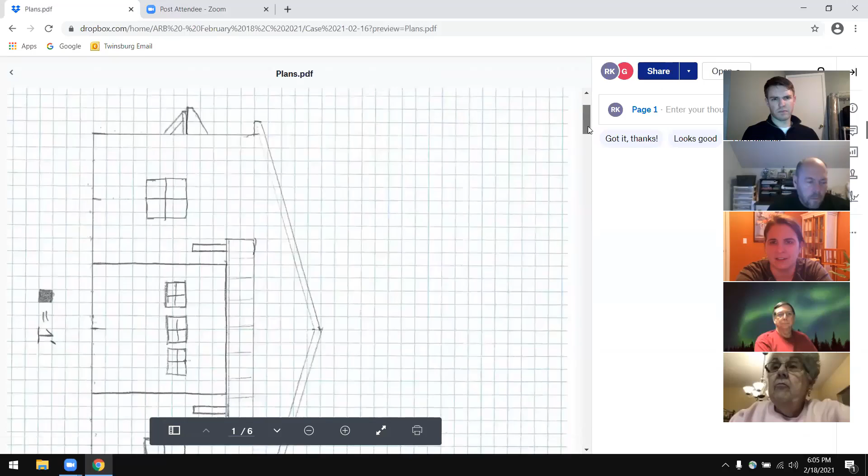Can you hear me? Yes. Excellent, can you see me? Not yet. Yeah, I see that. It's not giving me the option for my camera to make it a part. Oh, here we go. I'm in. Yes, you are. There we go. Hello. Hey guys, how are you? Good.

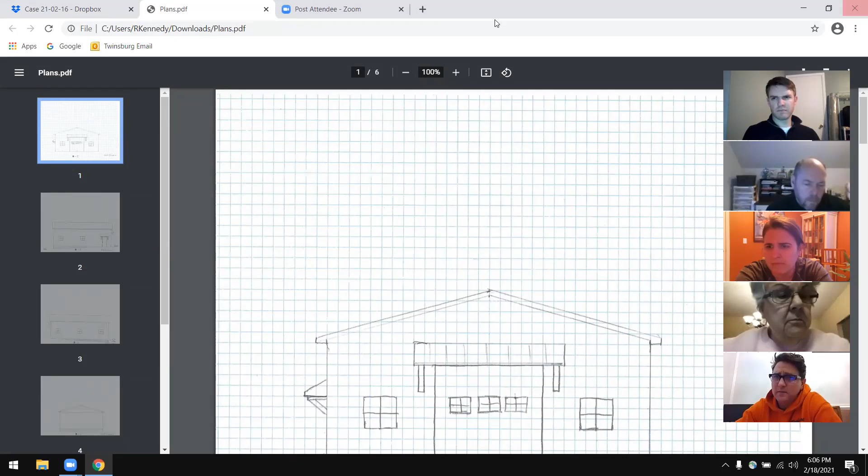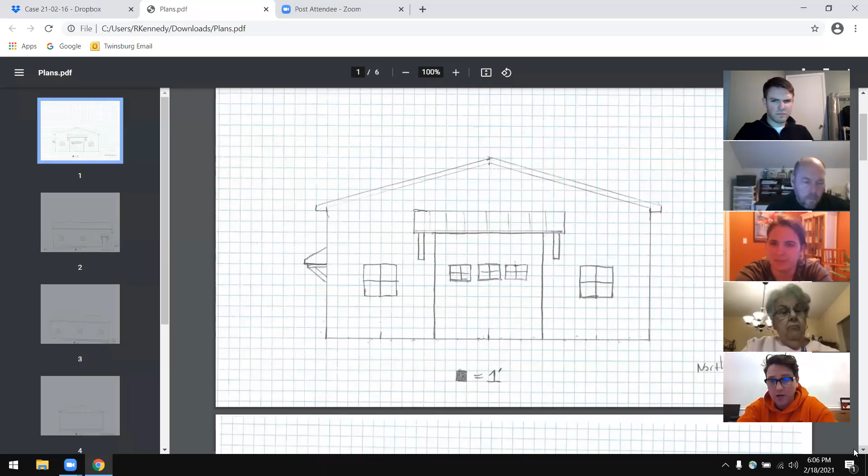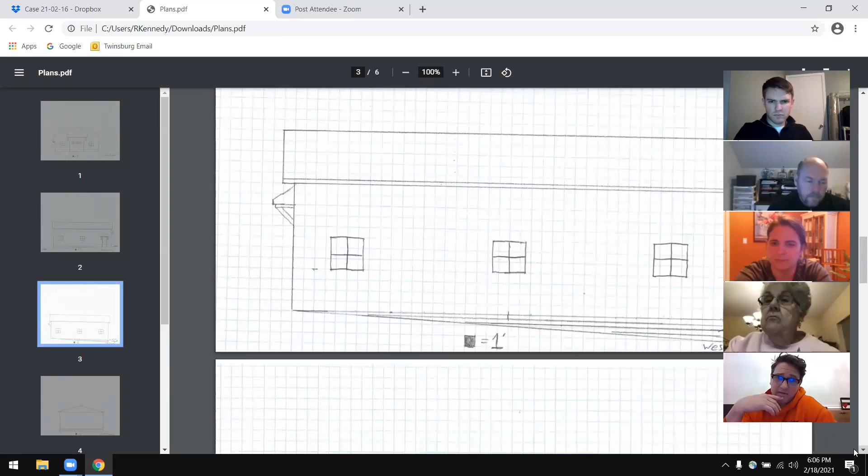This is a detached garage, I take it? Yeah, so very simple, very straightforward, very elementary drawing. But to scale, right? Yeah, savings, right? So this will be in the front yard of the current home, the front side yard I should say, within just touching the setback of the front yard. So essentially it's going to be a glorified pole barn with a little bit of detail to match the home, with some standing seam accents, the eyebrow over the garage door and the overhang over the man door on the side.

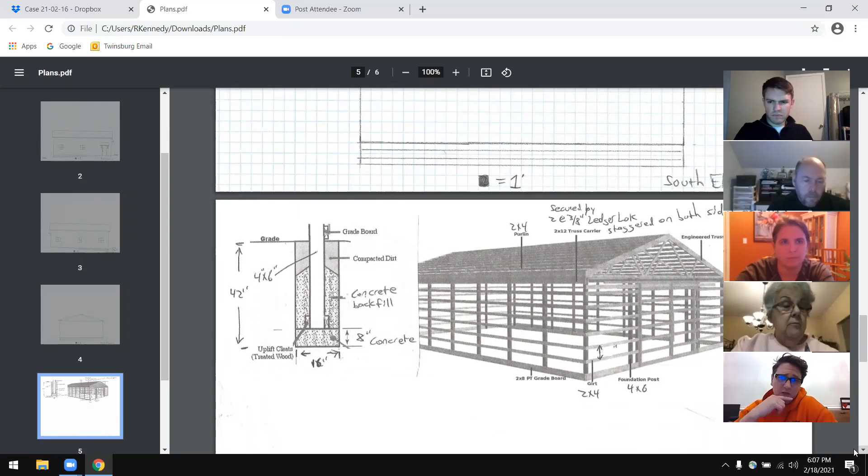I suggested, due to - their color scheme is going to be the typical kind of, as we've seen, just overdone these days, but the white and black. It's going to be black roof with black metal accents, white steel paneled walls. The main roof of the building, though, I am a little concerned because of cost reasons for the client.

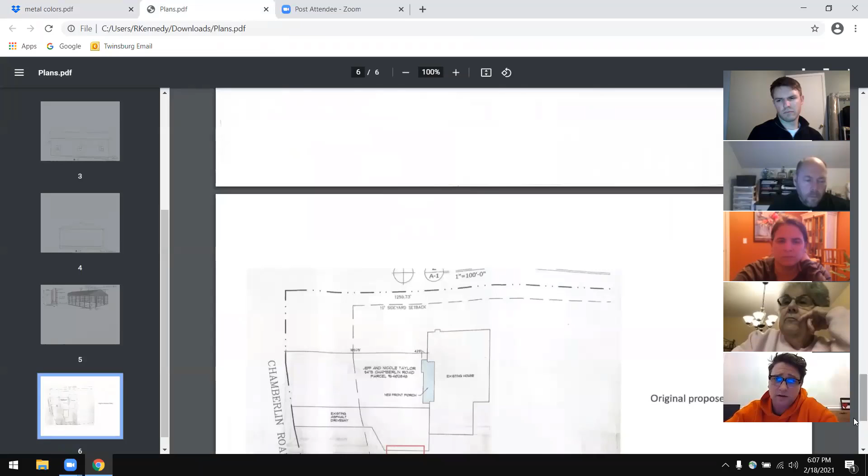There's currently standing seam on the house. We actually were the renovators of this house a few years ago, so at that time I did standing seam metal as an accent on the main house. So I'm curious to your thoughts on corrugated metal on something this large in the front yard, as far as the roof material, mixing with the standing seam metal roof.

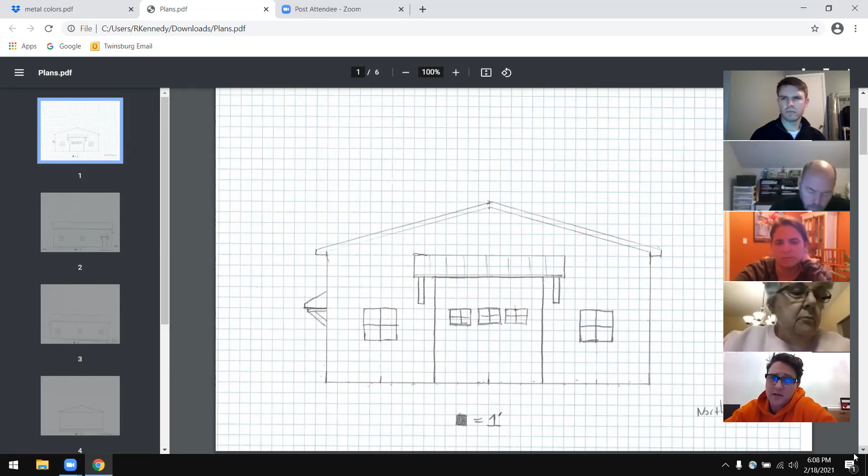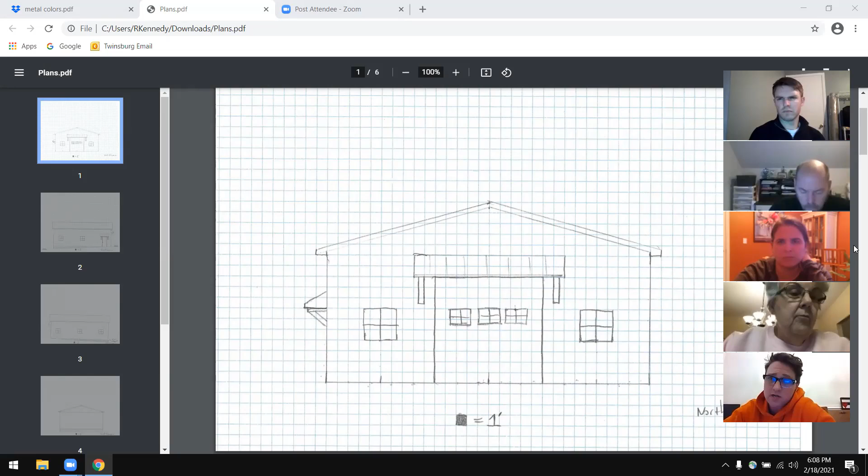I personally don't think it would be a good look, however there's a huge cost difference. The corrugated metal look is a lot less expensive than the standing seam metal. Or if the metal roof is not to be accepted as a corrugated metal roof on this building, then maybe we just stick to asphalt shingles on the building and do standing seam on the accent pieces over the garage door and the man door to tie into the existing house.

Yes, that I would agree. Hold on, it's Don Spice, one of our board members. Hi Don, are you able to call into the meeting?

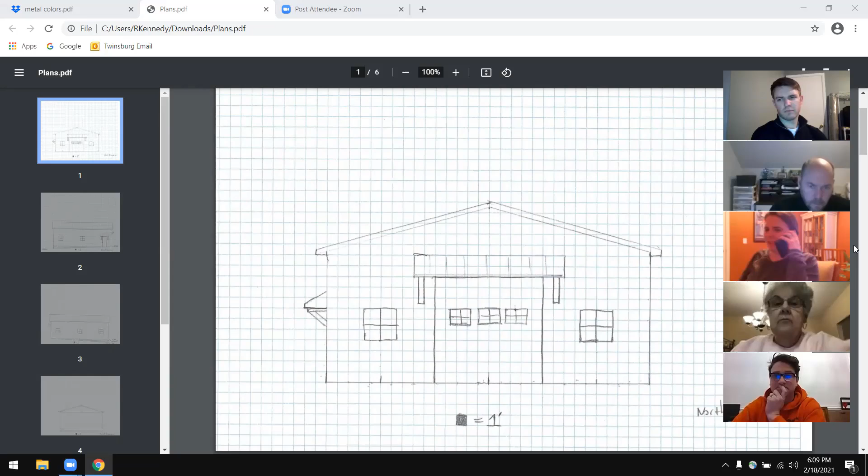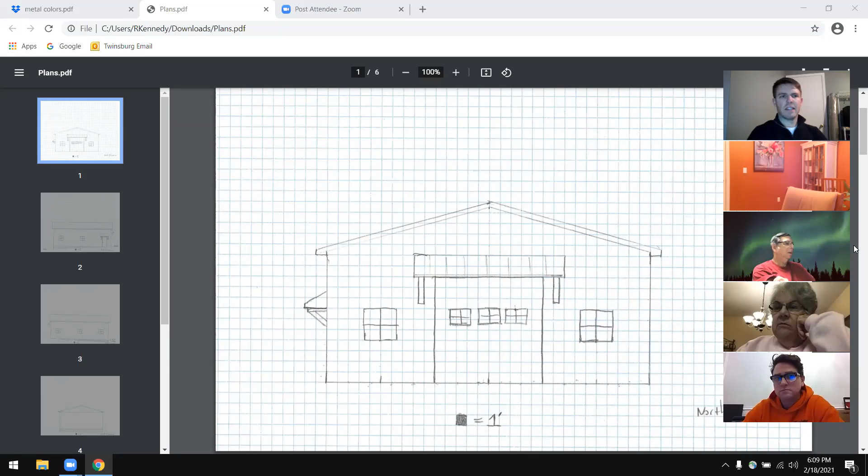Do you have any pictures of the existing home? Is there any on your pages here? I believe I submitted some. Well, I didn't see any on my PDF file, that's why I was concerned. Oh, it's a Zoom meeting. Yeah, there's not any - nothing that we got. I didn't submit anything for the existing home. Unless Ryan has some there. I thought I uploaded everything we have.

But is the footprint of this garage 20 by 40? That's kind of what I'm guessing. Well, this is a 30 by 40. 30 by 40? Okay, that's what's on the site plan, that's what that original proposed is, okay.

What color is the existing home as far as siding? The vinyl siding on the north, south, and east side has a couple of accents. The front facade of the home is brick painted. I painted it white originally, but they painted it a grayish tone. However, there is a gable face over the master bedroom on the front of the home that is also white vinyl siding. But the rest of the home is white siding, white 4-inch lap siding.

And can you still get the asphalt shingles to match the existing home? Yeah, it's pretty standard, charcoal gonna black.

Put you on speaker until we finish this case. Don, is that okay? Okay.

I would rather see them put asphalt shingles than a corrugated roof. Yeah, I agree. So would I. I think the metal roof is the look they want to go for, but unfortunately, the price point for standing seam on that big of a building is quite the sticker shock. Right, I'm the same, I agree. I would do asphalt shingles to match the house and standing seam for accents, or standing seam for the entire thing. Okay.

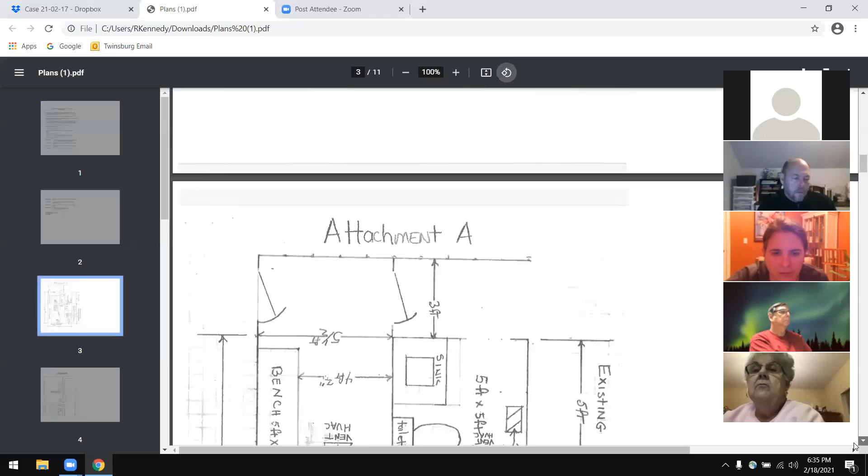I've got it. Vince is in the meeting. He's ready. I'm just in trouble with the Zoom. Okay. And I'm gonna drive my wife crazy, she's trying to help me.

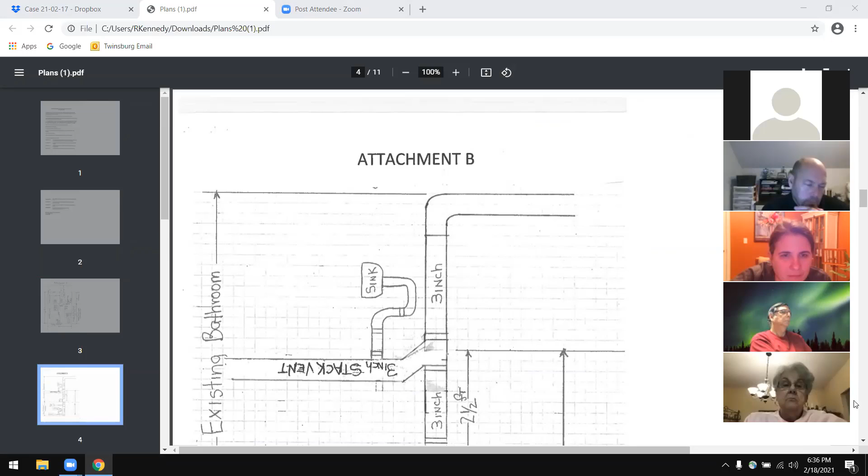So Vince, do you want to start presenting your addition? Vince, we can't hear you. Vince is unmuted, but I don't know, we're not getting anything from him.

Do you guys want to review it, or do you want to move on? Is he there? He's on the line. Yeah, I can see his video. Vincent, can you give us a wave if you can hear us? Is there a chance that he doesn't even hear us right now? I can see our applicant present, but not participating at the moment.

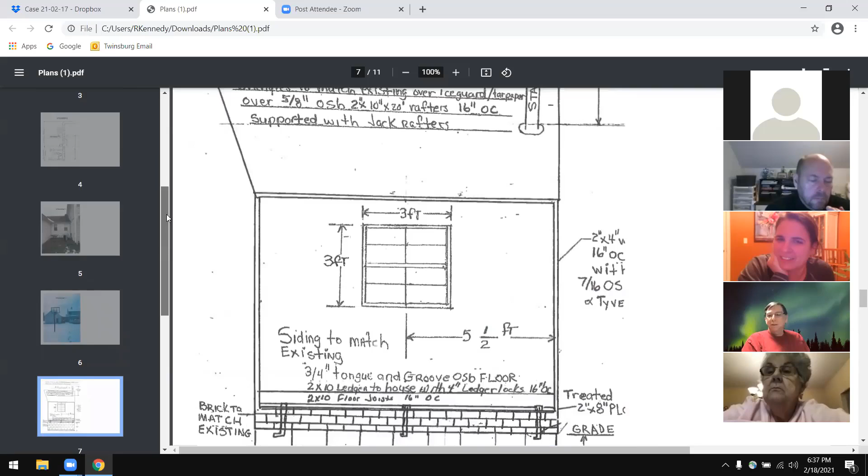So I'm hearing you on the phone. Right. Do you have a phone number for him? You can call him real quick and see if he's got his audio on. He may not have video or audio either way. Because he doesn't look like he's responding to anything we're saying, he's just kind of staring at the screen, I think. Right, I think he's looking at something else. He probably minimized this and he's going to check back, and he doesn't realize his case is up. Oh, he sees it.

He says he can see the board, but I can't. All right, oh, we hear there you now, there you go. Vince, I believe we can hear you now. Yes. Okay.

Okay, so is this an addition to your home? I don't think he hears you. He said I have no sound. I would put this on hold and go on to the next case. Yeah, I hit the unmute button. If he can't hear us though, maybe I'm not supposed to be typing. They might be talking about it, then they're gonna come back and ask me questions. Well, you know, Vincent, they can hear you. Are you there? Okay, are we able to type to him to let him know that we can hear him?

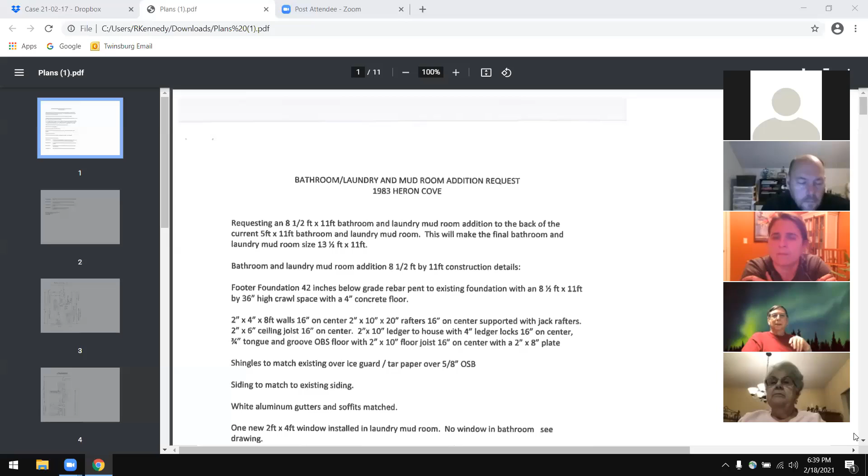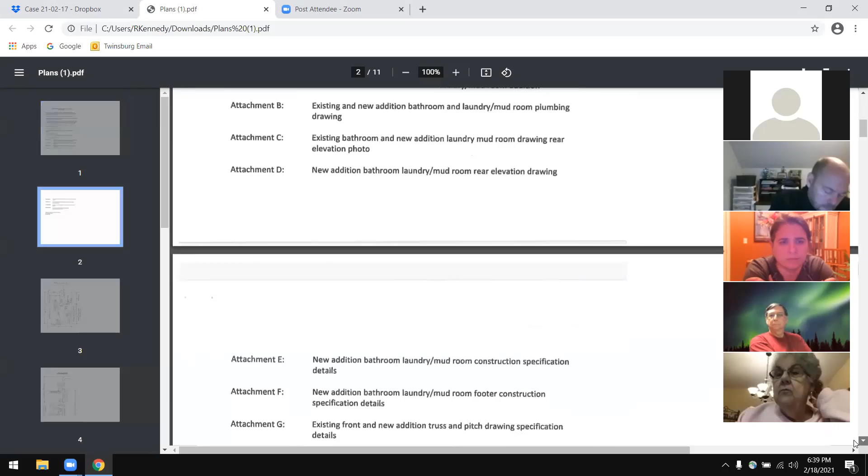My request is to add a 93.5 square foot addition onto my existing laundry room and bathroom on the first floor. As you can see from the footer foundation drawing, the footer foundation is going to be 42 inches below grade with rebar bent to the existing foundation.

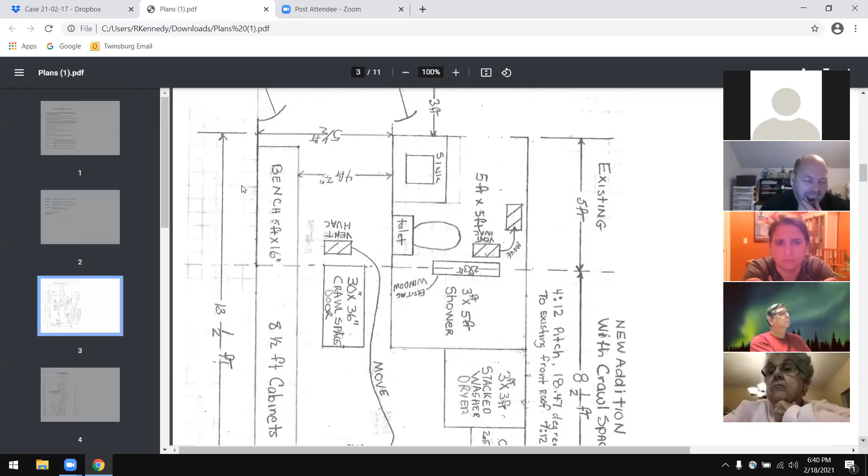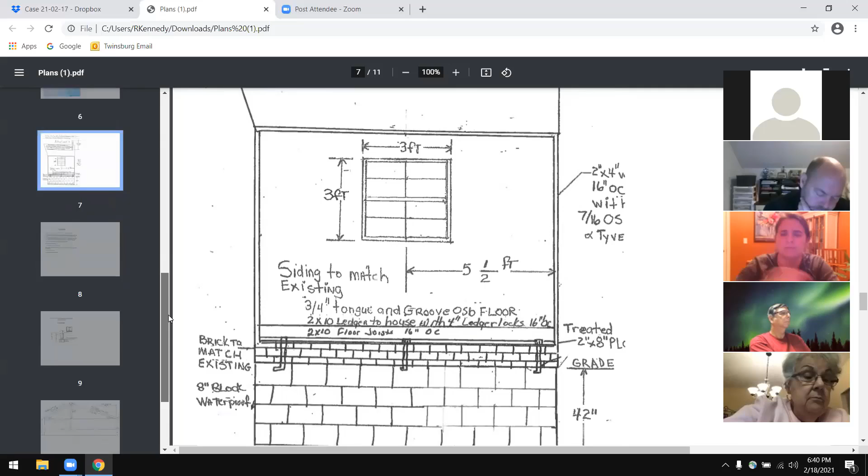It's going to be an 8.5 foot by 36 crawl space with 4 inches of concrete. We're going to use 2x4 by 8 foot walls, 16 inches on center. The roof rafters will be 2x10s by 20s, 16 inches on center, with jack rafters. The ceiling joists will be 2x6s, with 2x10 ledgers to the house using 4-inch lags, 16 inches on center, and 3/4 tongue and groove for the OSB floor, with 2x10 floor joists, 16 inches on center.

There will be a 2x8 treated plate. The shingles will match the existing shingles, with ice guard and tar paper over 5/8 inch OSB roof. The siding will match the existing. The white aluminum gutters and soffits will be matched - as a matter of fact, we're going to use the existing.

One new window - actually that window is not going to be 2x4. That window is going to be a 3x3. I don't know, that was a typo. On the print, I have a 3x3 window.

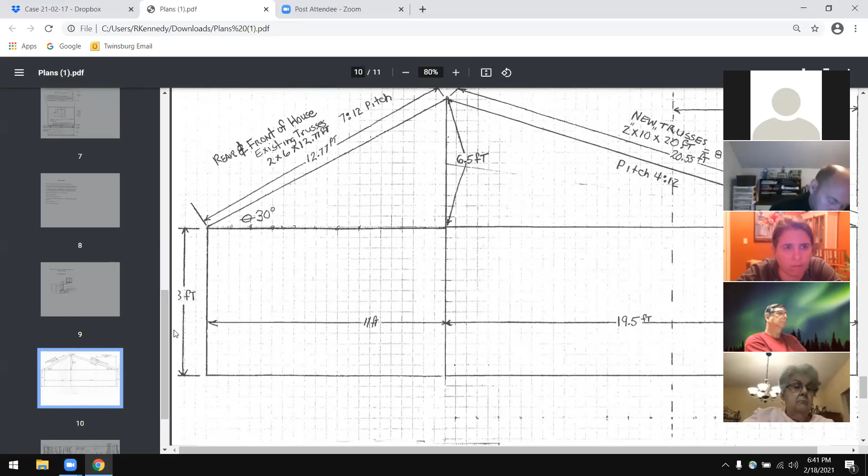The brick is going to match the existing brick. The new roof pitch will be a 4:12, which is roughly 18.47 degrees.

I provided you the following floor plans, which I see you have already gone through. The floor plans and the following attachments will be A, B, C, D, E, F, G, H, and what they're titled is right next to them.

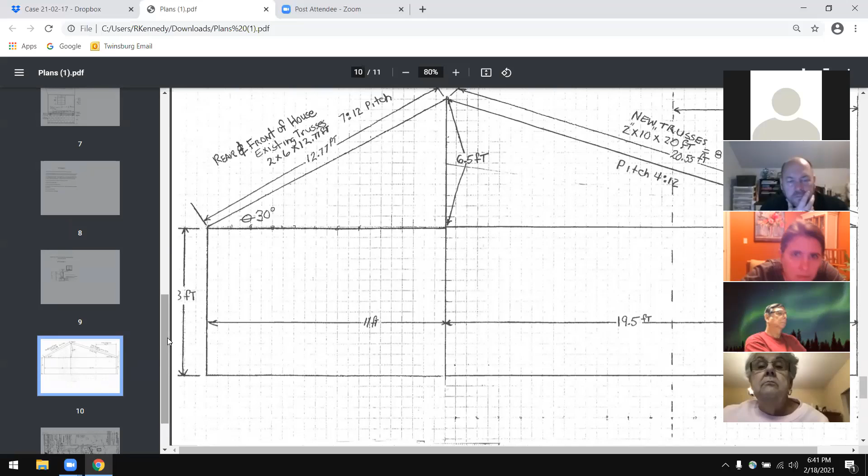Beginning with attachment A, I've shown you the existing restroom and laundry room, and the dotted line that cuts through shows the existing structure. The only thing not shown in that drawing is where the crawl space is in the new mud room and laundry area. I didn't put the existing window because I thought it would be confusing alongside the new crawl space hatch.

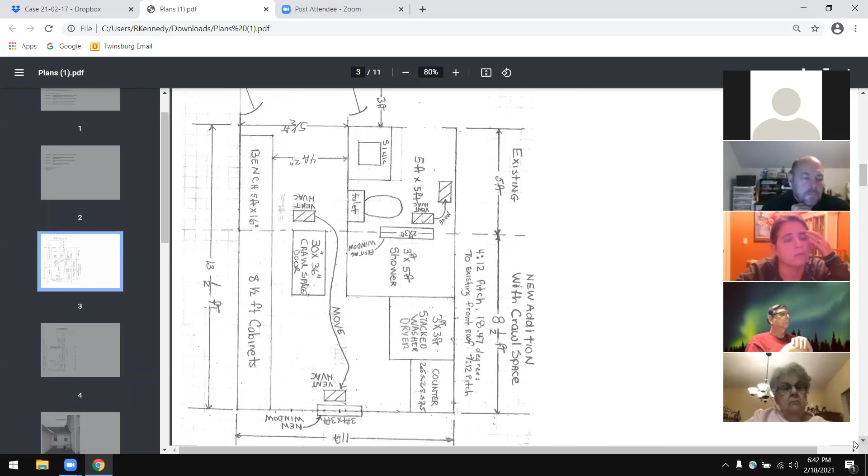As you can see, I'm going to have benches and cabinets running along one wall, and then I'm going to move the HVAC heating duct from its current location all the way to the back wall under the new 3x3 foot window.

In the restroom, the vent is going to be moved from its existing location over one joist or floor rafter, to prevent anyone from having to step on it to get into the shower. The 3x3 window is going in, and we're going to have a shower roughly 5 foot by 3 foot.

On the back side of the shower, I'm going to have either the washers stacked or side by side - right now the plan is to stack them, and if I do, I'll have a counter there. The 3x3 window will be in the back, matched to the same sashes and type of windows I currently have on the house.

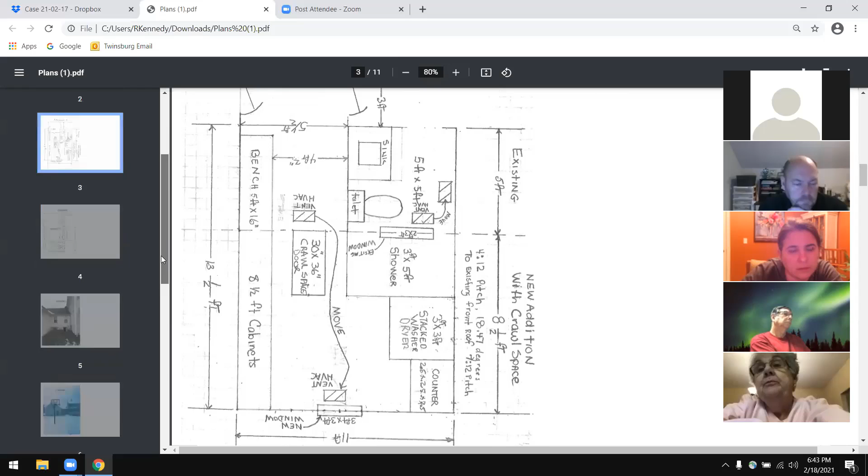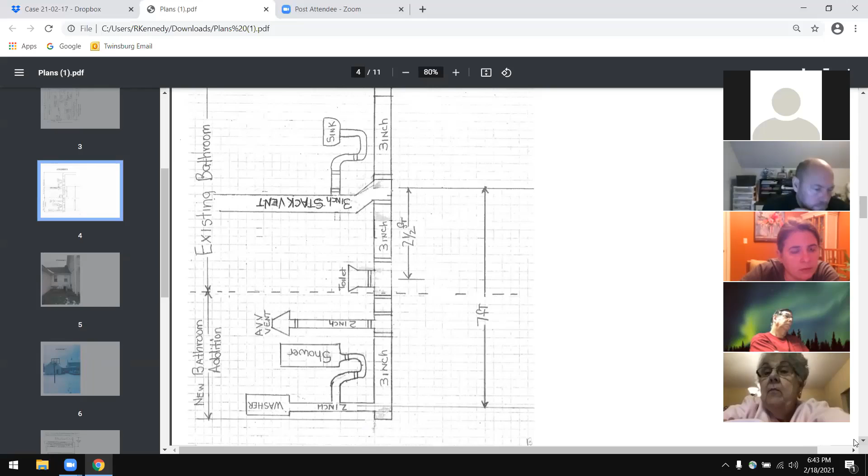Moving to the plumbing - my apologies, I meant to go there next - I've drawn a dotted line showing the existing restroom, with the current toilet and sink attached to the existing vent stack that goes through the roof. We're going to put an AAV vent in between that and the new shower and new washer, which will be on the back of the existing restroom. I've shown the distances in the drawings to make sure I met all plumbing codes, keeping the correct distance for the toilet and now the new shower and washer.

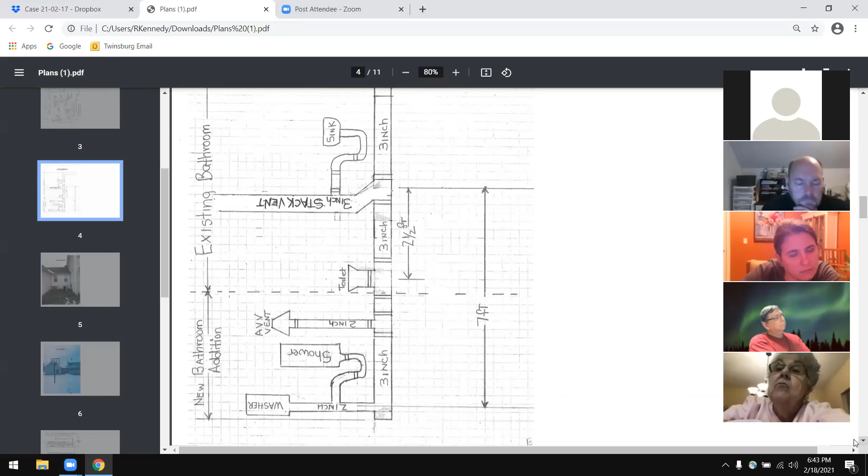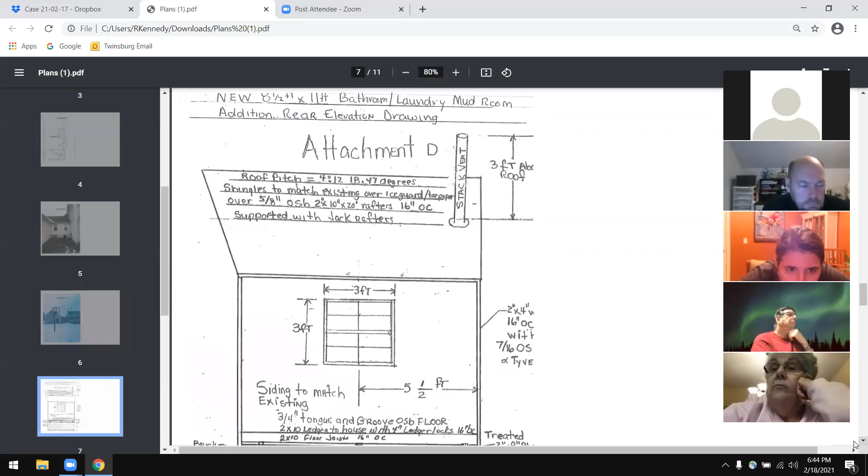In attachment D, I'm giving you the details of the roof. Again, the pitch will be 4 by 12, and it's 18.47 degrees. The shingles will match the existing, with ice guard and OSB, to everything that I outlined initially.

I didn't know if you wanted me to go over all that. The siding, again, will match the existing. We'll have a 3/4 tongue and groove floor, 2x10 ledger locks, 2x10 floor joists. The brick will be matching. We'll use brick, 8-inch block, and waterproof it all the way up to grade. And we'll have 2x4 on-center construction.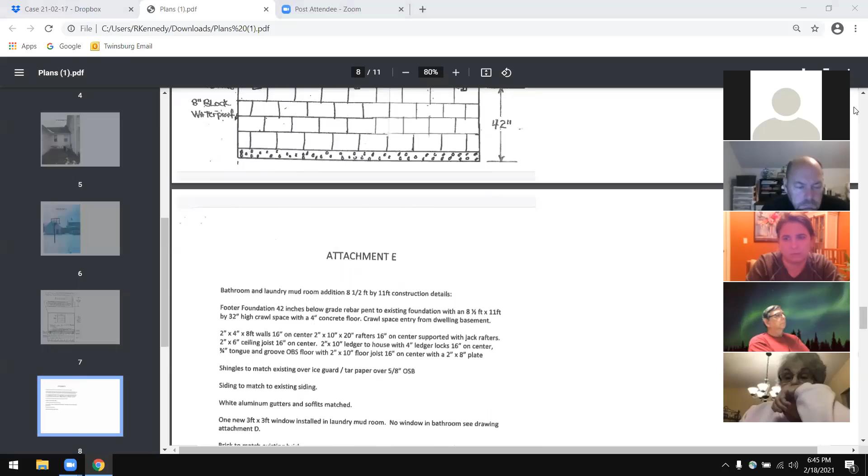As you see, the new window, which will be 3 by 3 foot, will be exactly in the center of the new addition, to make sure that it's balanced with the current window and structures of the house.

Then in attachment E, I went through the same information that was on attachment D, just to pull it out so you can see it on a list, as opposed to having to look just at what I wrote on the sheet of paper.

In attachment F, I'm giving you the construction details of the footer, showing you that there will be a 32 by 32 crawl space. We're also going to use 8-inch block, an 8 by 16-inch footer, 4 inches of concrete, and 4 inches of gravel.

And again, the crawl space, that had to be changed. That's not going to be on the sidewall — that's an error on my part. The crawl space will be through the floor. The reason I changed that is because after talking to structural people, they said it's better to put the crawl space in the floor and not cut the block from the basement.

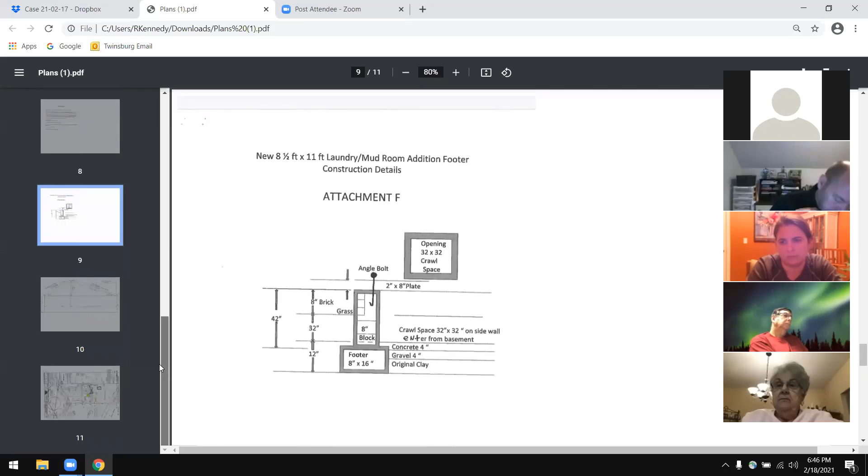Now I'm giving you the side view in attachment G, showing the existing front pitch, which is 7 by 12, and the existing rear pitch, which is going to be a 4 by 12.

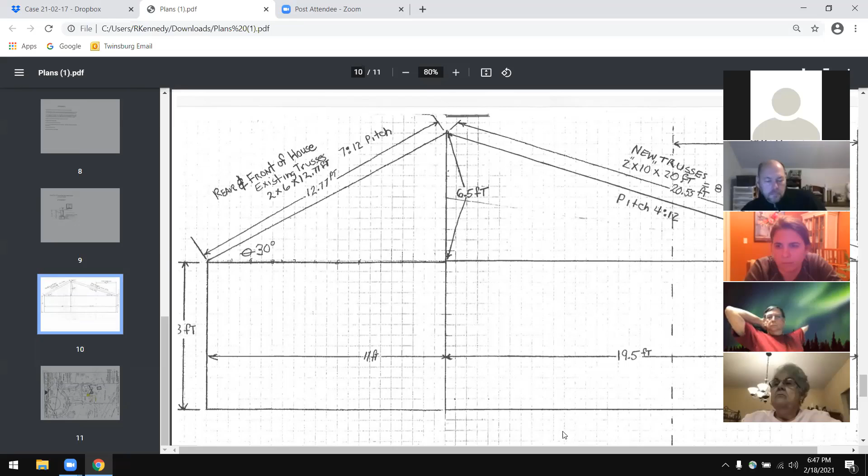And because of that pitch, even though it meets code, I'm going to put de-icing heater coils along the roof and along the edge of the roof to make sure that, even though it's still legal, that pitch doesn't cause any freezing of the gutters.

And finally, on attachment H, which is the existing plot, I have highlighted in yellow the addition, which comes on the rear of the current laundry room.

And the one thing we didn't show, which wasn't in the original print that hasn't been updated — the garage was extended 17 feet, I think about 2 years ago. So I just blocked that in to show that the garage was extended another 17 feet back. Are there any questions, comments, or concerns, or do I need to provide any more details?

What development are you in? He probably still can't hear us. Okay, I just typed him a message: I still can't hear you. You guys are talking to me.

It was a good presentation. Very good. Yeah, most of it doesn't pertain to us, but it's very, very good.

So I just sent him a message asking if he can see our typed messages, and I typed: Vince, your addition seems well considered and fits with the existing home. Oh, I can talk — you don't need me to type. I can talk. That's right. Okay, the existing...

Vince? Maybe he's typing a response back.

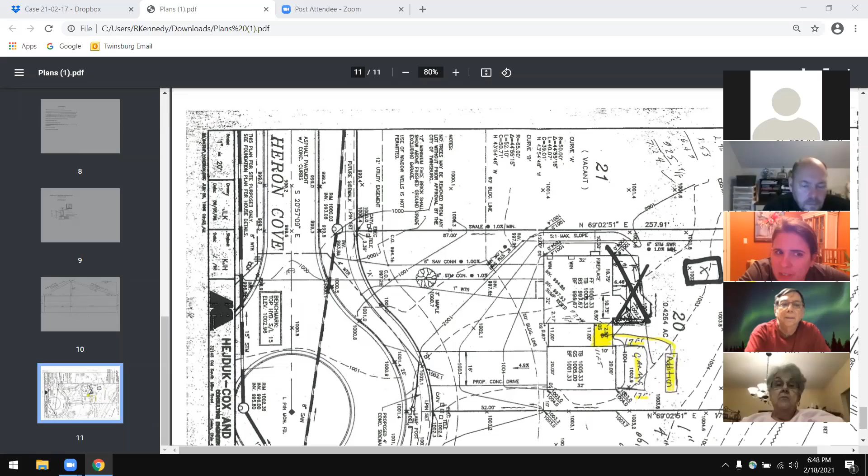I asked about how the existing roof is tying, or the new roof is tying, to the existing. He showed that the existing front roof was at a 7-12 pitch. Yes, you will build over it with the 4-12. If you are extending the roof at 4-12, the eave will be lowered. Yes, but the eave will be lowered in the rear section, not in the front. Will that interfere with the window?

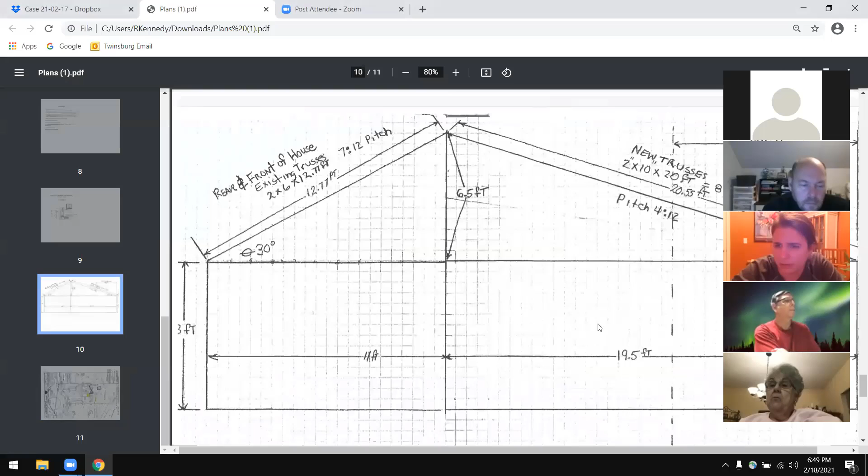I'll type that, Jennifer.

It's still going to come up. The angle will be lowered from 30 degrees to 18 on that back roof. Is that all the way from the top, the peak of the roof? He's gonna make it a 4/12 all the way, back.

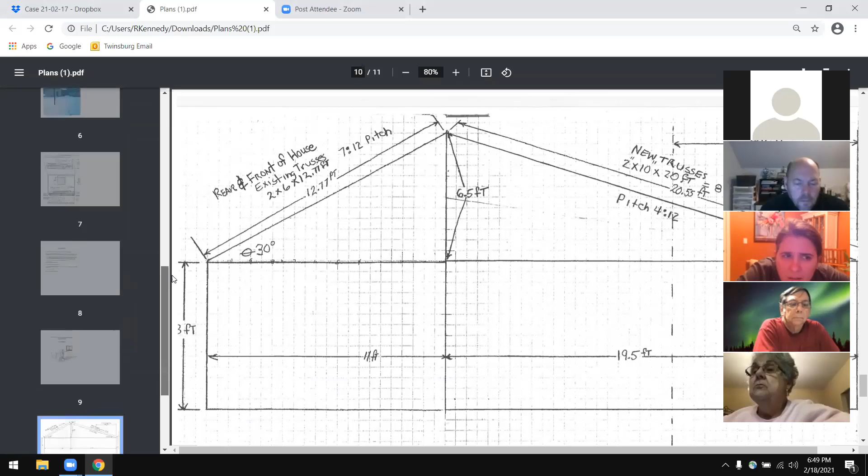That will not impact the windows. You'll still have a 10-foot high wall, an 8-foot high wall at the back of the house, so it won't affect the windows. The windows will be stationed exactly where they're at, with a 6-inch 2x6 header, and they'll fit exactly. Only difference is if you're trying to get up in that crawl space, it'll make it a little tighter as the angle pitches down.

All right, I'll make a motion to approve it as submitted. I'll second.

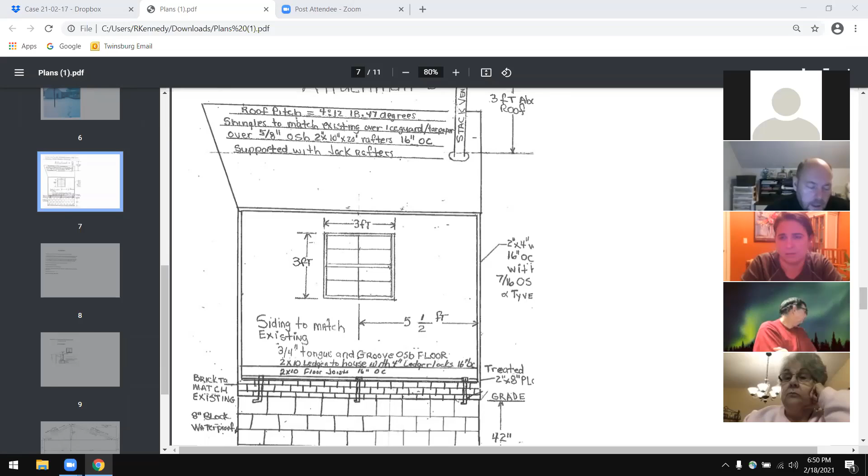I'm trying to document it type-wise. Okay, so roll call: Jennifer, yes. David, yes. Marge, yes. John, yes. Don, yes.

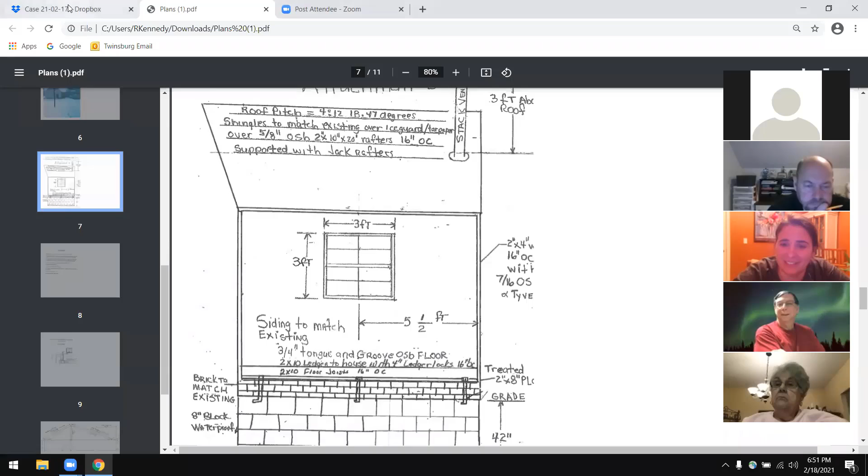Thanks for bearing with us on getting that one through. I know not everyone has the same equipment, same capabilities, so we try to work with it if it seems feasible, and it seemed like we could do this one that way.

Let's see who we got next. I think this is EasySign. I believe this is Jeffrey Clark.

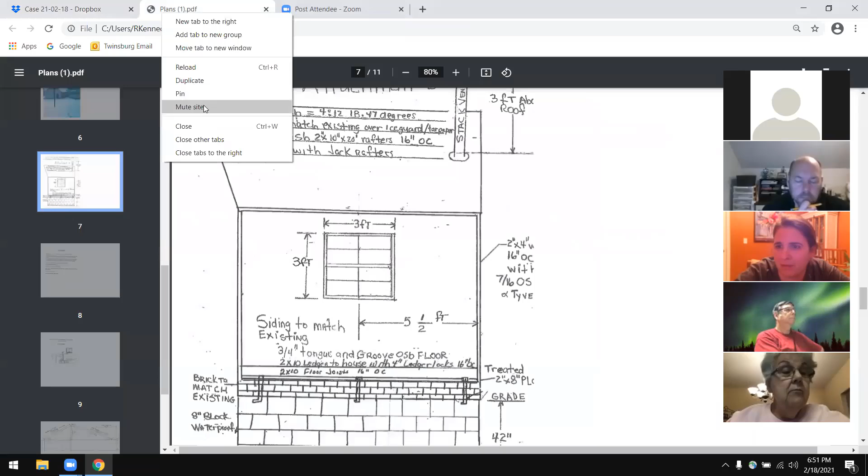Hello, can you hear me? Yeah, Marge, I just muted you by mistake. I'm sorry, you need to unmute, Marge. I hit the wrong name. But yeah, Jeff, we can hear you. Am I good? Okay, can you hear me now? Yes, can you hear me now? Good evening, everybody.

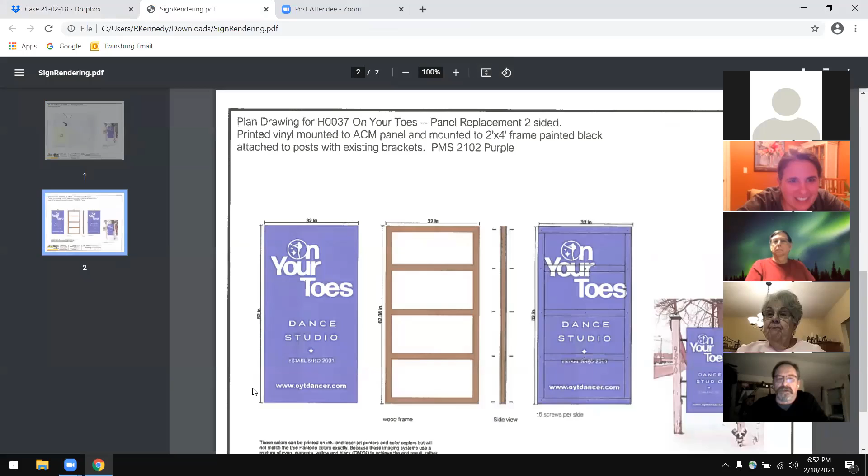On Your Toes Dance Studio. We're presenting On Your Toes Dance Studio. They're trying to get their business going again. They've been really impacted by the past year, and they want to put up a sign and get little girls in for dance lessons.

All right, yeah, what age did they start at? You know, I don't know. I got 3 daughters, but I don't really know what age they start at. I'm guessing probably 3 years old, maybe. Okay, mine's a little young still. Mine's a little old, I think 44 is probably too old, right? There are some dance schools that have adult classes.

So what they wanted to do, they wanted to do something really cost effective. So we're going to reuse the posts that are there. They're sturdy, they're sound, there's nothing wrong with them, and use the existing mounting brackets and attach them to a new two-sided panel, more of a box than a panel, with printed graphics on it.

So the color that's like a purple color, is that pretty much a true color that's showing up like your ink is? Kind of, but not. I don't know if you can see this. Okay, that's pretty close to it. The 2102 color is close, but this is their paint color inside the building and on their business cards, and this is kind of their branded color.

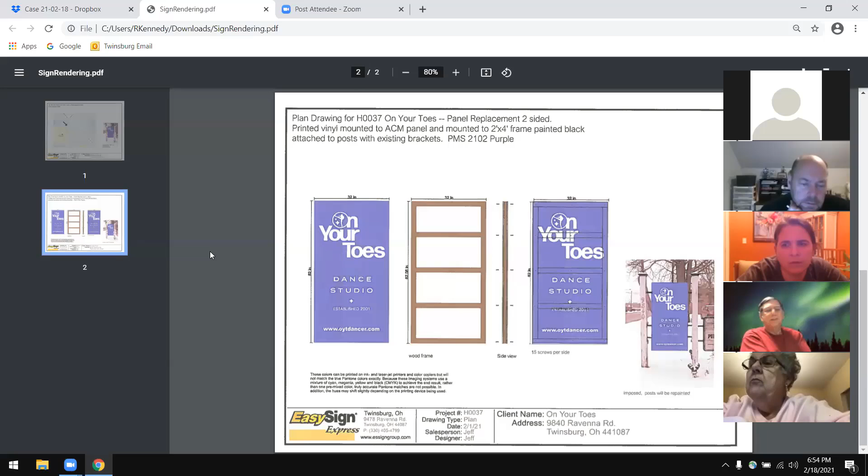Well, I was talking about, it looks like there's another sign to the right side post. There is one still there, yes. And actually there's one where the On Your Toes sign is. It'll be replaced, it's falling apart, delaminated plywood, pretty bad shape, that'll be coming out. Is the other one going to be coming out? I don't know anything about the other side. I don't think we're going to take it out, but I'm sure the tenant or the building owner could. So I don't think it'd be a big deal to unscrew it and take it out.

So there were two small signs in this location. Right, there was a sign on the top and on the bottom on this side. So she's taken over the whole side. She was offered both pieces, and she wanted to have maybe two smaller signs, but then we talked about it, and one larger sign was more effective. Yeah, okay.

Well, I think it looks fine. I'll go ahead and make a motion to approve it as submitted. I'm wondering about a frame around it, a border.

What are the sides of it? The sides are going to be wood painted black to match the metal brackets that are there, and to kind of drop that back to nothing. It's only going to be about 2 inches wide, probably. She really wanted just a clean look and wanted to keep the price down and not get into a lot of extras. She's had a bad year.

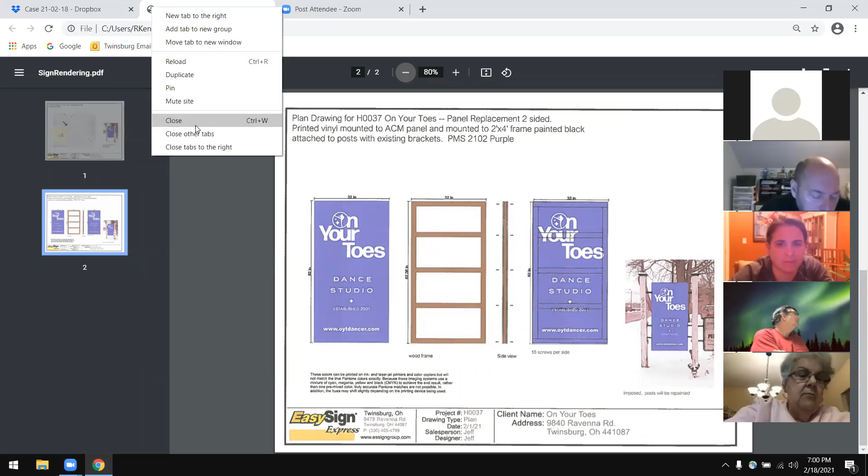They must have taken over the old dance studio there. I'm wondering if they changed owners a few times and locations. Yeah, and at one time it was well known as Sharon School of Dance. I remember that, her daughter was a Rockette, I think.

She had a good reputation, but I know it's changed hands several times since then. That was Bob Volker's first wife, Sharon. She was a nice lady, I've met her several times. My daughter went to her for a while when she was very young, she did acrobatics, that type of stuff.

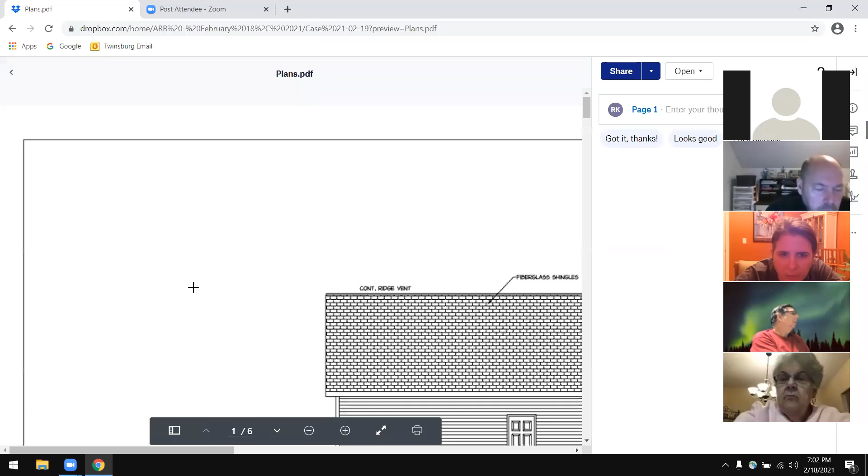Now your next participants here, we have 4 Jeffs on this agenda. I'm wondering if they have 2 locations, because I thought they were located much further up Ravenna Road, and it looks like they're still in. No, that may be a different dance studio, Jen, the sign says On Your Toes. Really? So I don't know if they relocated or if they're holding 2 locations. Okay, hopefully they make it, it's a tough time for them.

Okay, so our next case is a residential addition on Sunview Drive. Where's that at? Glenwood Acres. It doesn't look like one of the acres homes that got an addition. Yeah, the addition is very, very nice. Yeah, it's sure looking good.

My original plan was to just add to the west side of the house, but my driveway and the next door neighbor's driveway are on the same side, so there's not much room between the two houses. You've got a nice front elevation though. Basically, I wanted to put an addition on the house to put a facelift on the front of it, move some of the rooms around inside, add a second bathroom with a laundry room, and the addition is the garage and a great room with a new kitchen and dining room in the back.

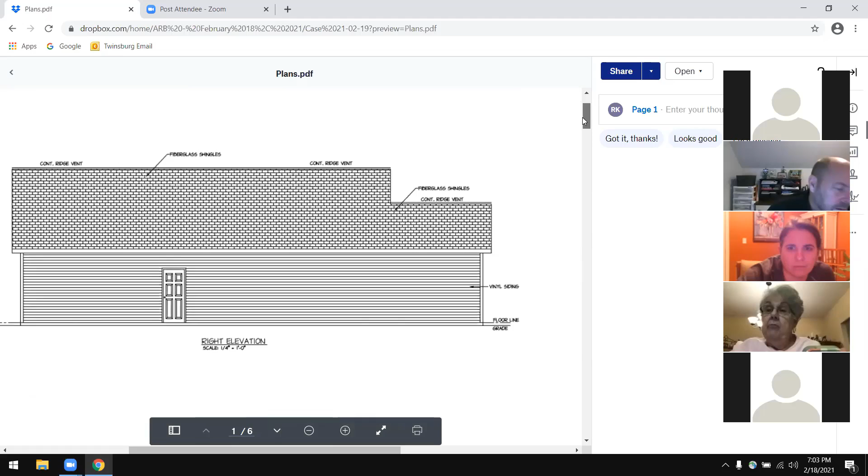So you're almost doubling the house? I'm only adding 700 square foot of living space, but yeah, because the house is only 988 square foot. It's an original Glenwood Acres home.

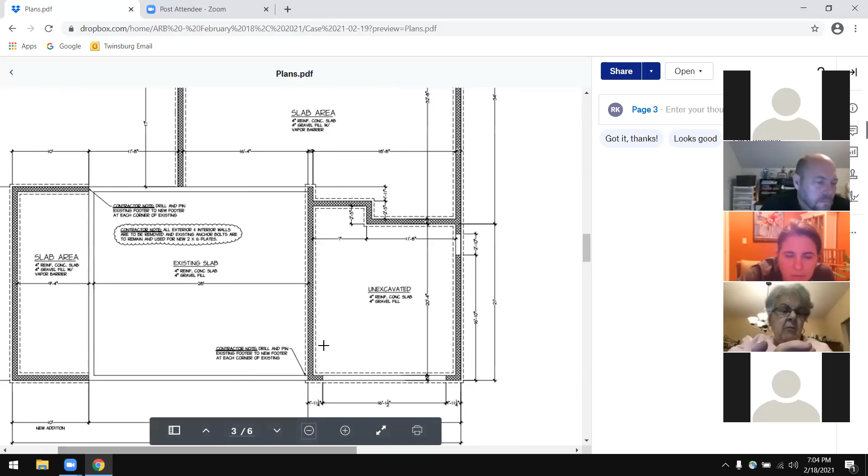So we're gonna have setback, vinyl siding, asphalt roof. One of the requirements, we're gonna put a cement driveway in when we're finished. The plans call for trimming the existing foundation about 9 feet on one side, adding 10 feet to the other side to make up room for the 20-foot garage. This contractor will drill and pin the existing footers together.

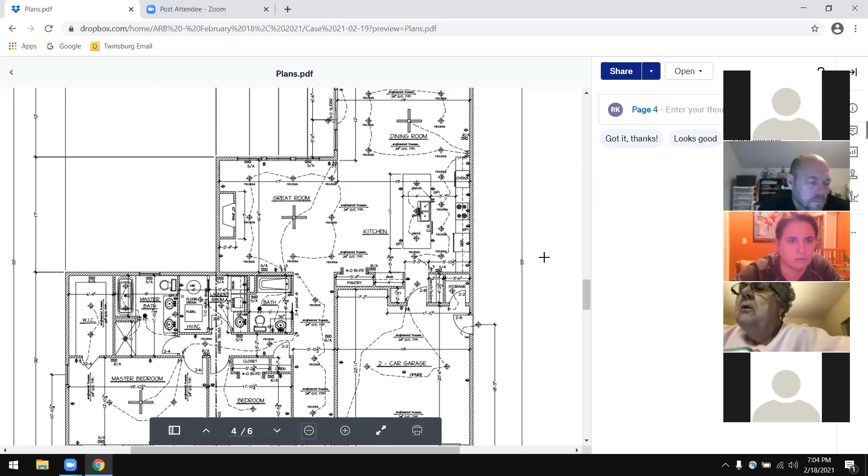I'm not sure what to say, I'm pulling it up again here, hold on just a minute. I wanted to add 5 foot to the garage, but the designer said that if I did that, I would have to actually get a variance for it, so I didn't put it on the original plan.

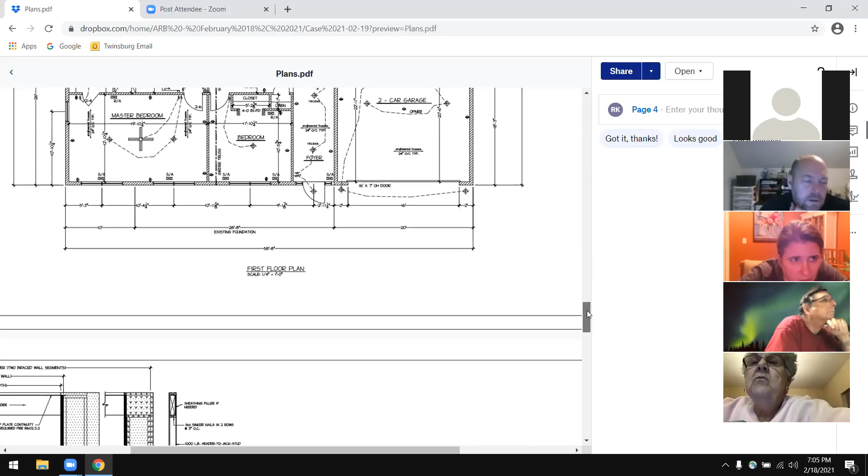Is that for side yard setback? No, it's just the front yard. Is there a front yard setback or a front setback? Yes. The original, I forgot what the setback is, but what I have now is I think 63 feet. Yeah, that's what's up. I mean, you can always apply for a variance and see what happens. Most of them pass. Yeah, as long as they're not too extreme.

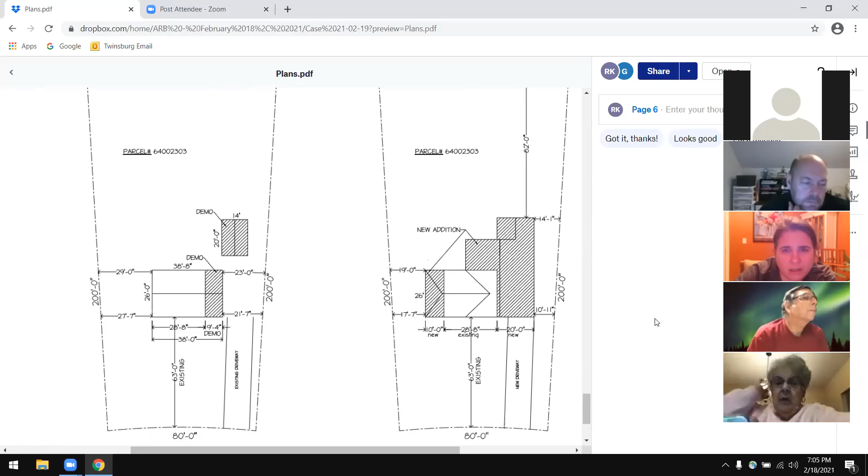I just wanted to, because the garage is 19 by 21 feet, and because we were putting the garage door on and then we have to raise the floor 4 inches, it gives me like 20 feet. And I have a truck, I kind of like to park my truck in a garage in the wintertime, so it's going to be kind of close. I understand that, that's not a big enough garage by today's standards. Where your foyer is, is that existing?

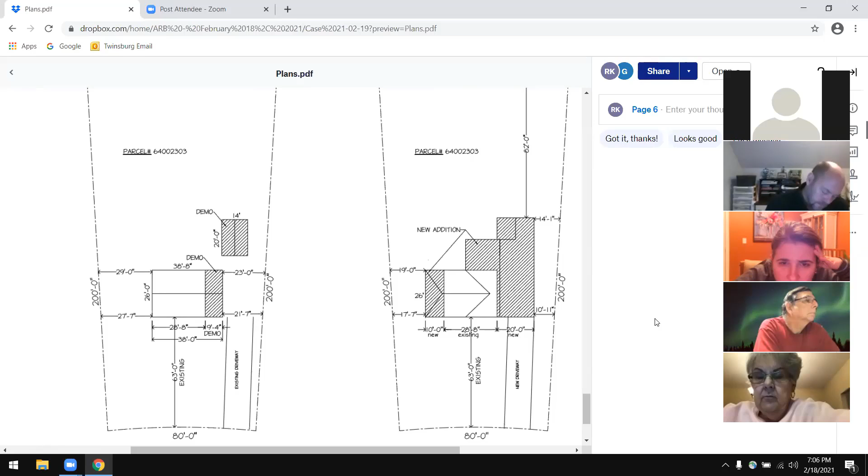Say that again? It looks like it is. I think I see here, the foyer that you're putting in is existing. I don't have the picture, I can't move the picture, can I? And then the garage is new, correct? Well, everything to the left of the garage is existing. When you see the garage itself, 20 feet of the garage is going to be new. At the edge of the foyer is the existing.

Right, and where the ceiling fan is in the master bedroom is going to be added on to the other side because I needed to make up 10 feet. The only way to make it up was to cut it off to one side and put it on the other. I didn't want to do it, but that's the only way I could do it because I have 29 feet on the east side and only 23 feet on the west side.

Okay, your garage, the 20 feet is the outside dimension, so on the inside you'll really only have 19. But we could probably pass it and you could find out if you can get a variance, and you'd have to come back maybe. I'd probably be fine even if it didn't get passed. My truck's 20 years old, so I'd maybe have to find a smaller truck if I had to. But that's an option for the next month. Are you planning to only park one vehicle in the garage?

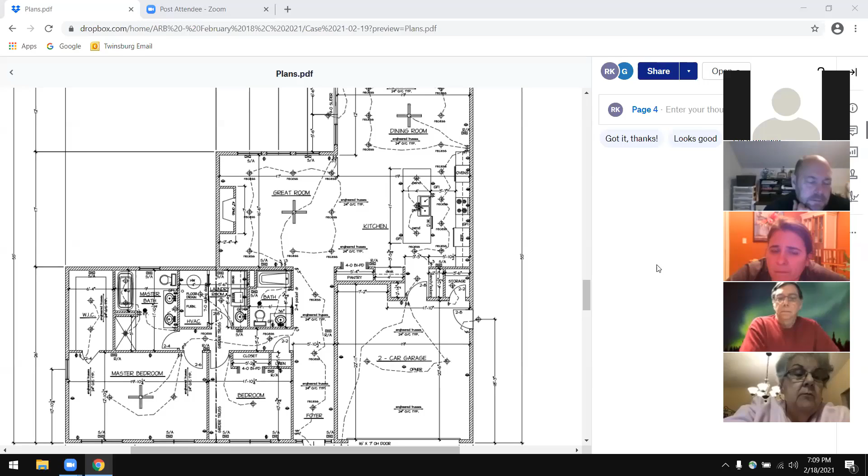You can see me right now, but my garage is 19 by 21, on the inside, as we speak. Oh sorry, I've got too many windows open, I don't see you. If you're Jeffrey - yeah, we're only seeing your name, we don't see you. But that's what I have right now, exactly what I put down, and our vehicles fit. So you're aware, okay.

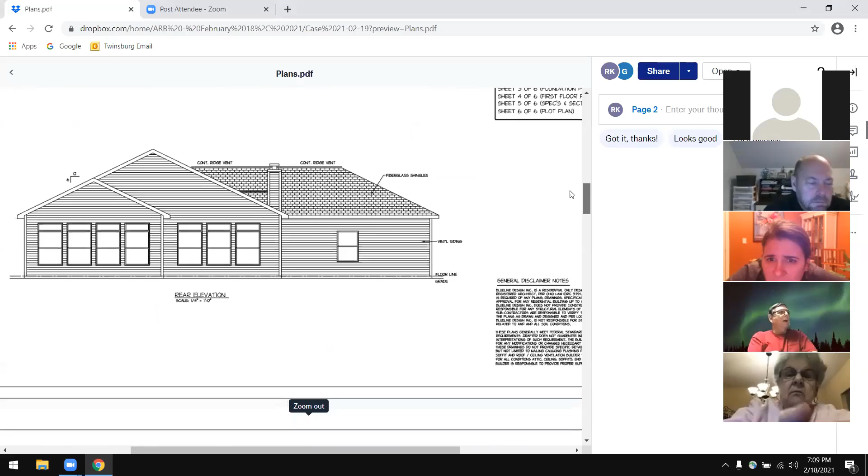So then my only thought is getting a window on that right elevation. Yeah, I was looking at that too and thinking it needed something either in the front by the garage or all the way to the back in the den, that's about the only place. The kitchen counters and stuff take up a good portion of that wall. So you'd either have to put a window in the side at the dining room or in the garage itself.

We could put a window in the back where it says vinyl siding there. We could actually put a window there. That would work. How many feet off the corner, moving forward? It could be - we could center it because the addition there is 12 feet, so we could center it at 6 foot and put a 3-foot window in it. Yeah, I think that would be pretty good. So we're gonna get that window then.

Are you demolishing a freestanding garage or shed? Yes, the garage is coming down. Ryan, do they need a permit to destroy a garage or no? Yeah, he filed for one already. Okay, great, thanks.

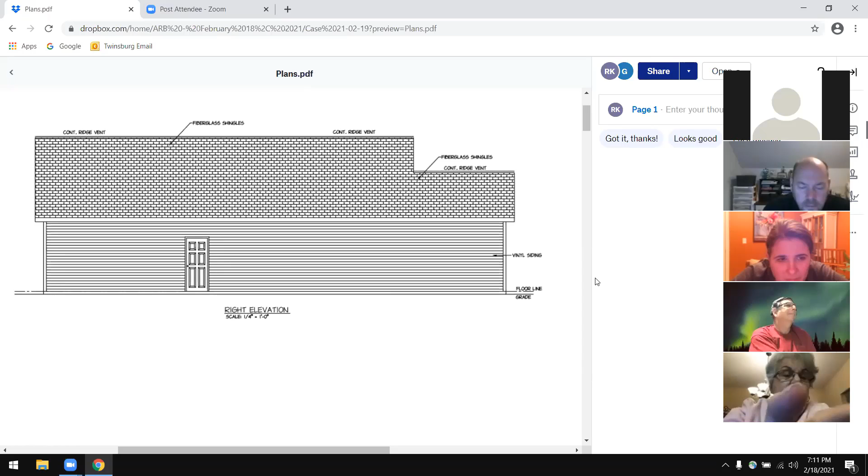Great job, I love the way the house is gonna look. Thank you. What color siding are you going to use? Pacific blue, and we're going to use white trim, black asphalt roof, white windows, and we're debating whether white or black trim on the shutters.

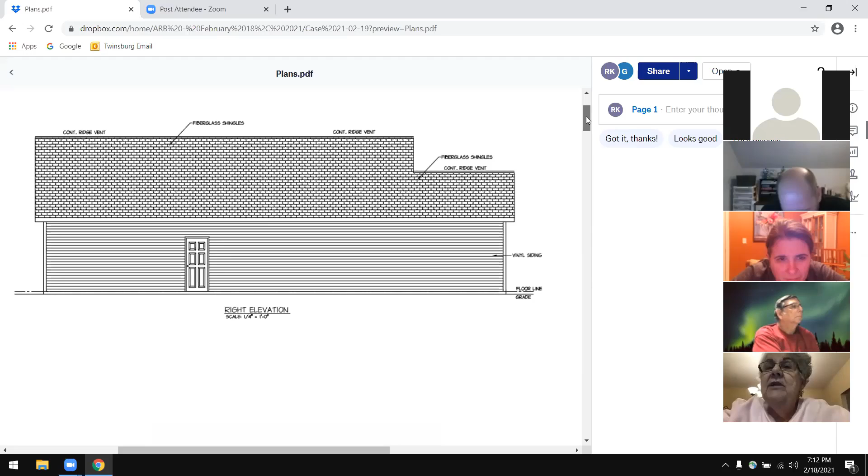And that's what the wife wants. I think maybe I would suggest white shutters. I don't know how the rest of the board feels. Either one would be fine. Yeah, I don't mind either way. I'm fine with either one too. Okay, we'll let them make the decision on that. Thank you so much.

So the motion is to approve as noted, and the note we have is the addition of a window on the right elevation. Correct, that's it. I'll second if nobody else has. I don't think anybody has yet. Roll call: John, yes. David, yes. Jennifer, yes. Marge, yes. Don, yes.

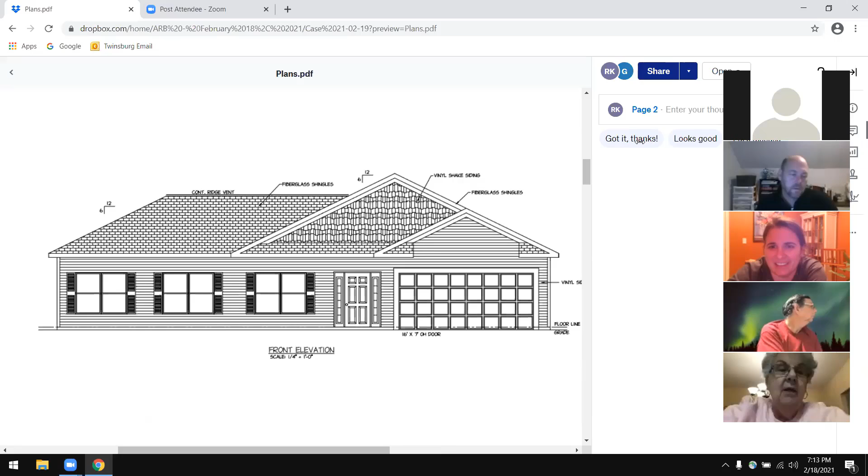Thank you, all right, thank you so much. You're welcome, good luck. Hi Jeff - it looks great, thank you Maureen. How are you? I'm good, how are you? Pretty good, waiting to see your face, wasn't positive it was. Yeah, we just decided to move back to Twinsburg, so I bought an old house, we're gonna fix her up. That's exciting - we just sold this house and we're moving out Saturday, so after Saturday we're gonna be without a house. Oh, but back in the burg, huh? Yeah, yeah. Oh good, good. Well it looks great, have fun with it. Thank you so much, okay, bye-bye.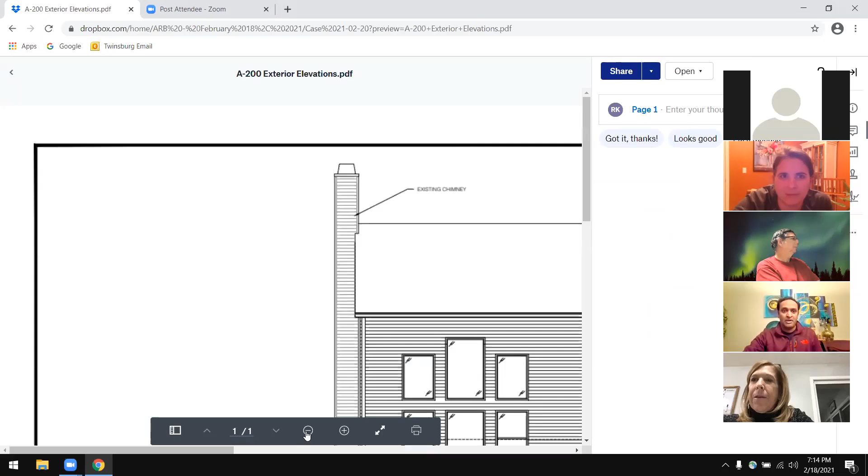I know I'm not going to be as detailed as Vince was. I was listening to him, but I'll try my best to answer all the questions. Looks like a good project.

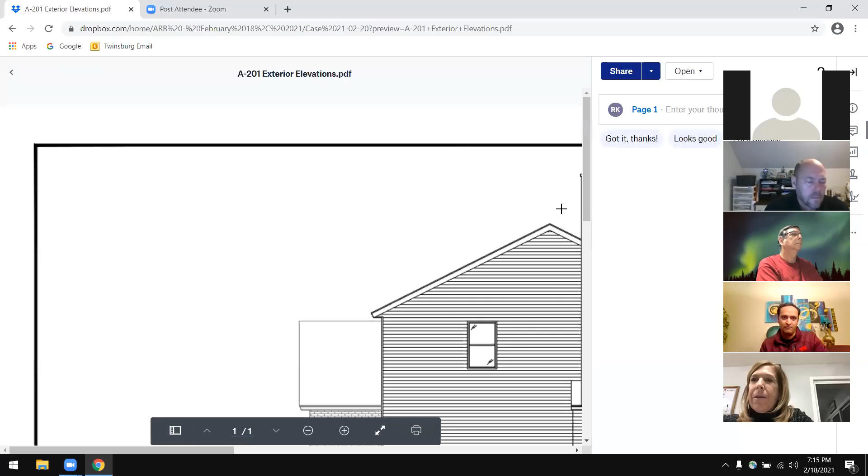We're trying to add a sunroom into the house, an addition to the kitchen. We'll knock out one wall in the kitchen, the patio door, and make a 10 by 20 sunroom enclosed in the house. Right now we have a deck, so we're gonna knock that out. Basically, where the step up of the deck is, the enclosure will start from there, and 20 feet to the right, a little bit by that window. That's the actual plan, and it'll be 8 feet high ceiling, just like our kitchen, to match with the kitchen interior. The windows will match with the living room or family room, the one that has 6 windows.

This is the south side view. 2 windows on that side, then patio door on the north side, and 3 windows in the west.

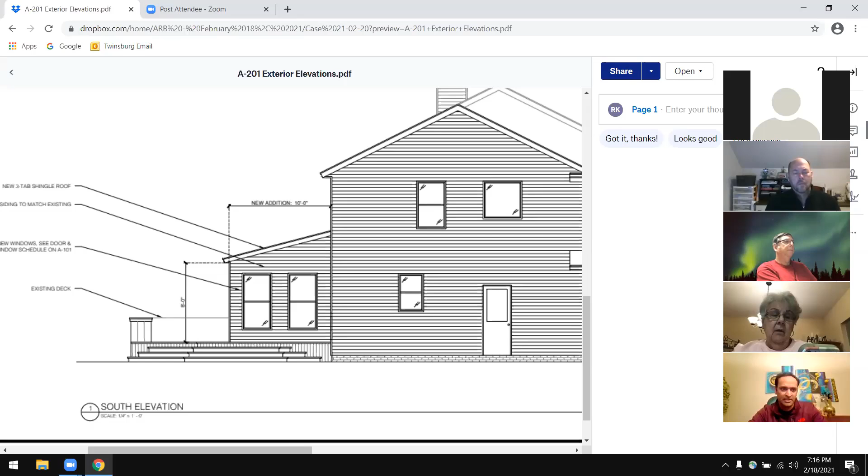Is this coming out of the dining room? Not the dining room, but the eat-in kitchen. Right from there. If you open the interior picture, I think that's where it is.

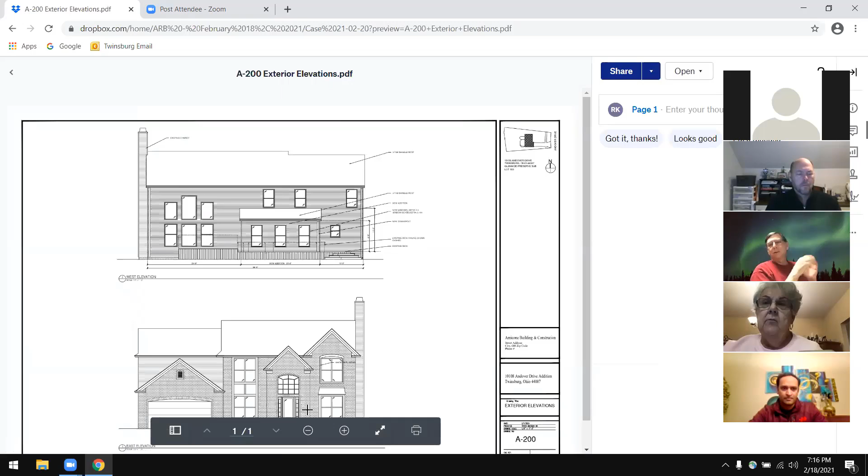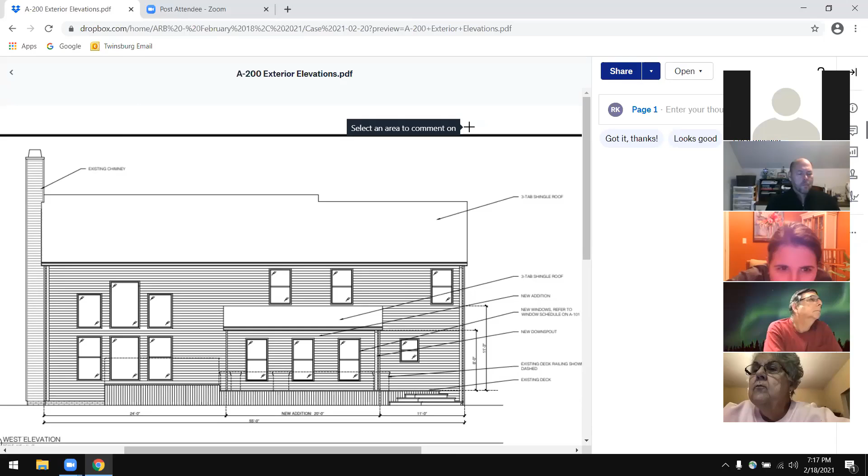I would just shift the patio door over so that it lines up with the window on the opposite wall. Sorry, the print's really small here, I don't know if I can read it. Which elevation are you looking at? I was looking at the enlarged plan, A101, and then I saw it on the elevation.

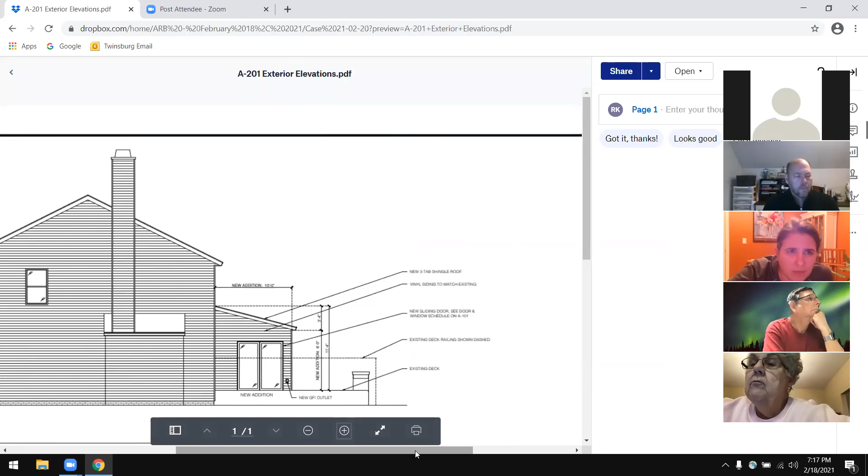So it'd just be that sliding glass door moving over, approximately 6 or 7 inches to the left. That would have it align with the same return for the windows on the other side. But were you trying to put a piece of furniture next to it? Otherwise, I didn't see a reason to have it so close to the corner, and not right next to the patio door now.

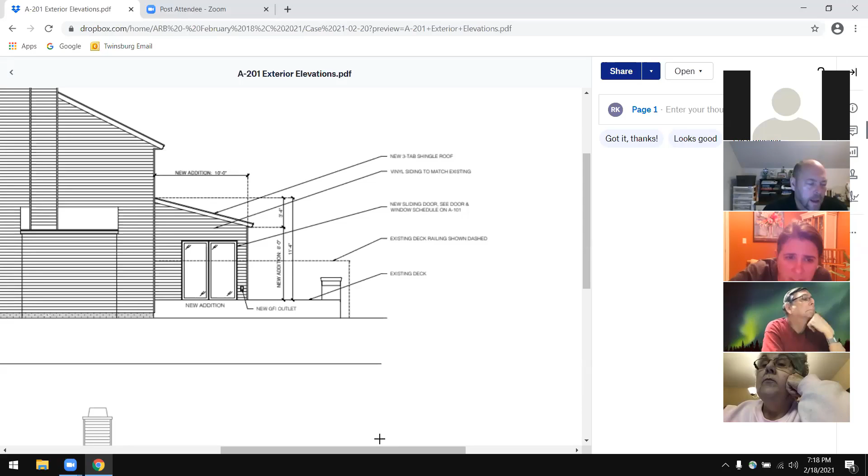Okay, but Jack, you're saying centering it between? Not necessarily center it, no, I wouldn't center it. I'd just move it, it's really only like 6 inches or so to the left, the same distance that you have the window on the opposite elevation. Got it, okay, so just match with the opposite window and in the same alignment. Right, it'll make that wall on the inside feel more symmetrical.

If you hang drapes, you'll have the same amount of wall on each side showing. I don't know that you ever would, but I'd just move it so that it has the same amount of wall return. Yeah, on that side it's only 7 inches. The door right now is sitting 1 foot from the dimensions they have, 1 foot on the door and 1'7" for the windows.

Plus the siding looks funny when it's little pieces, so that'll help out with that little bit of extra siding. But otherwise, I think it looks nice.